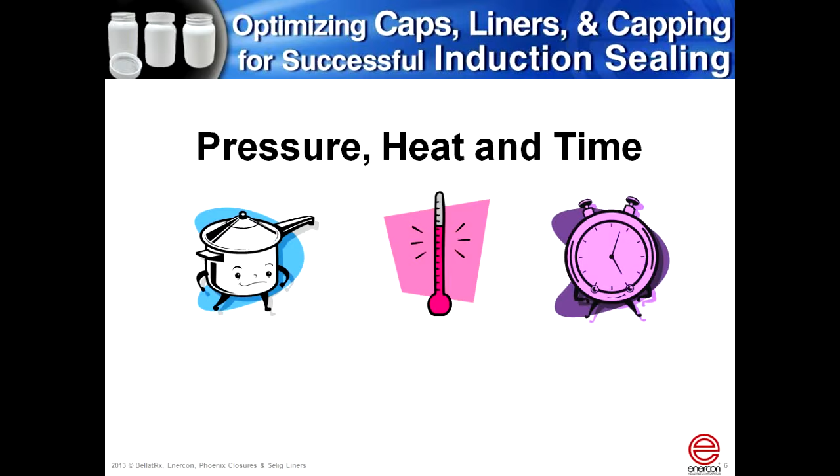I'd like to begin by introducing Ryan Schilke, who will cover the principles of induction sealing operations. Thank you, Mark, and thank you everyone for joining us today. We're going to start the webinar on a high level and discuss basic principles of induction sealing that apply in any application. The first piece we're going to talk about is one of the critical components to understand, and that is the theory of pressure, heat, and time. Any sealing process that you undertake in your operation is going to require those three elements. So let's dive into each of them a bit deeper.

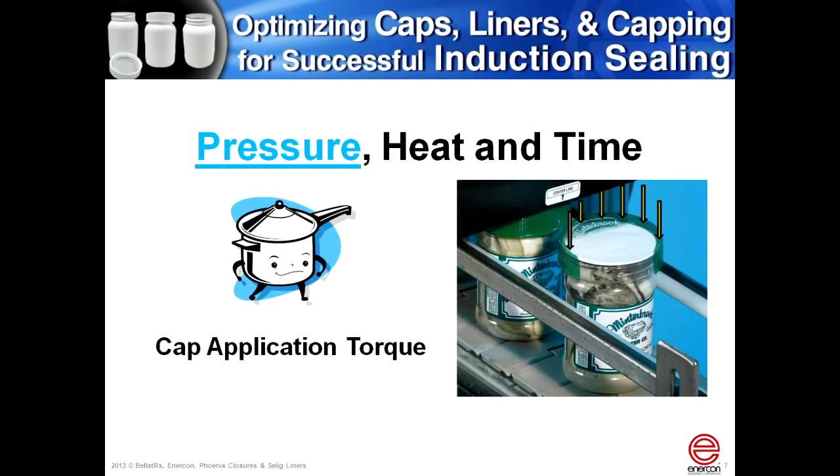Pressure in the induction cap sealing process is very critical. The pressure that is applied from the cap to the lining material, which puts it in intimate contact with the bottle, is provided by cap application torque. We're going to talk a lot about cap application torque throughout the webinar today, so keep this piece in mind as we go through.

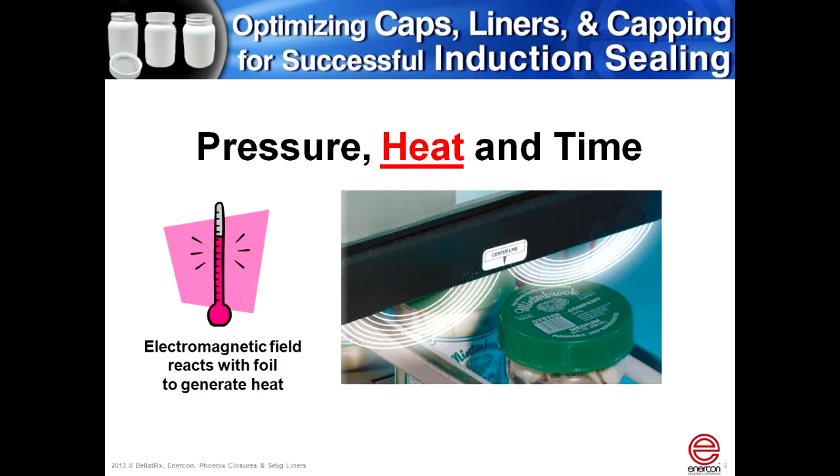The heat component in the induction sealing process is generated by the induction sealer itself. The picture on the screen here illustrates the magnetic field that's created by the induction sealer. You'll see the little white arcs coming from the center towards the sides of the sealing head in this picture. That indicates how that field generates throughout the width of the coil. This happens to be a case where it's going to be a wider application. It happens to be a 63 millimeter closure, and the heat is going to be varied based on the power level you set the machine at.

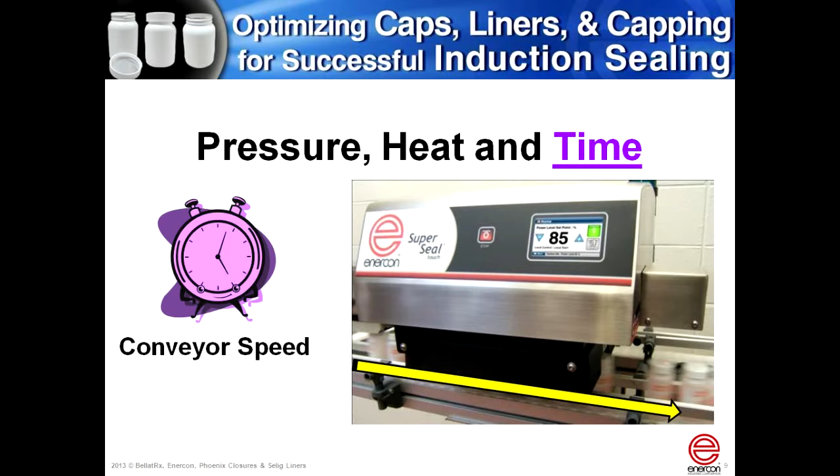The final component in pressure, heat, and time is obviously time. Time for this is not necessarily in minutes or seconds, but it is dictated by the conveyor speed, by the belt speed at which your product is running. So we'll take a look and say if you're running 50 feet per minute, we'll size the machine appropriately for 50 feet per minute, as well as knowing your cap diameter and the cap style involved.

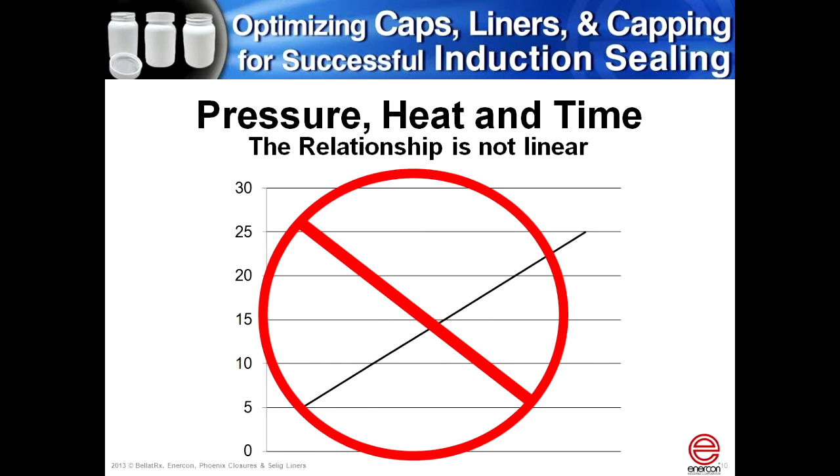As we talk about time, an important thing to remember is that the relationship between this pressure, heat, and time equation is not linear. If your product is running at, let's say, 100 feet per minute, and you decide to increase that by 10% to 110 feet per minute, keep in mind that the relationship between the power level needed on the machine is not necessarily linear. There are cases when it does happen, but it's always important to run and qualify your operating window, which Jeff from Enercon will get to a little bit later in the presentation.

So let's talk about a few variables in the induction sealing process, the first of which is air gap. And when we talk about air gap, what we're referring to is the distance the foil is from the sealing head, or the top of the closure from the bottom of the sealing head. This is important to be consistent.

The gap can be 1/8 of an inch, which is something we often recommend. Sometimes it's 1/4 of an inch, completely acceptable as well. It could be 1/2 an inch, but that probably isn't going to be overly effective. You're not going to use your machine as effectively. But the most important thing with your gap is that it's consistent.

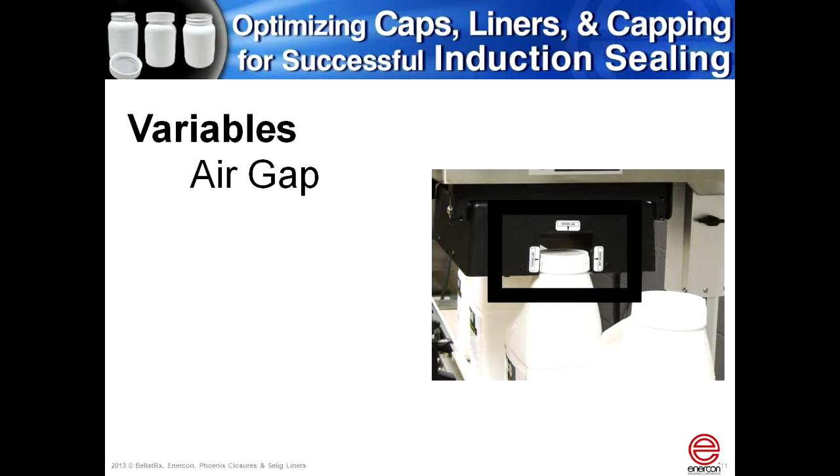And we actually provide a tool with each of our systems. It's about an 18-inch ruler, 1/8 of an inch thick. You set one or two of them on top of a bottle on either end of the machine, simply lower the machine down, and that will set your air gap consistently each time. And Jeff, again, will dive into that a bit more later.

In these cases, it's important to note that you're doing this in your application, and we'll design a special sealing head for your application to make sure we can be just as efficient as possible.

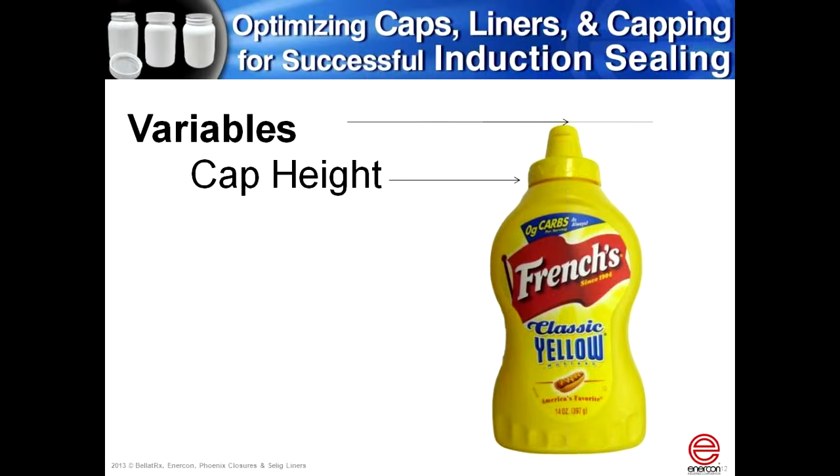I mentioned it in the pressure, heat, and time component, but application torque, I'm going to mention it again. We're going to dive into it deeper, but this is the most critical component to get right in your induction sealing process to ensure every time you're as consistent in your seal as you'd like to be.

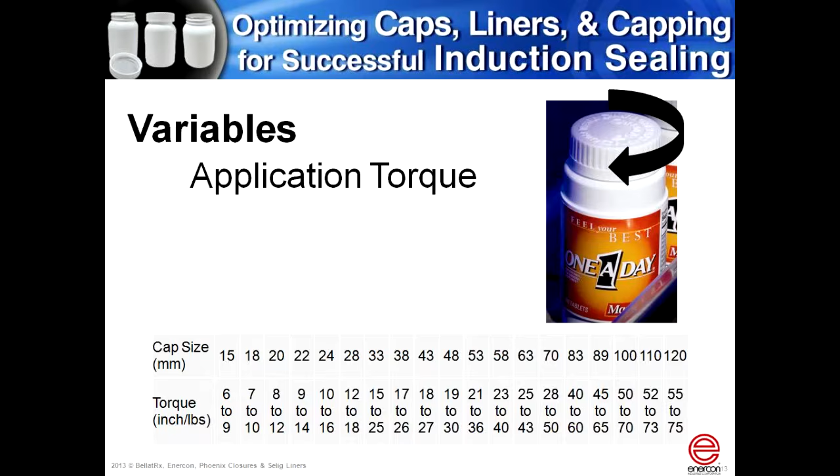The final variable that I want to talk about is material change. And this can be anything from a wholesale material change, maybe that's your packaging, your bottle in maybe an HDPE bottle and you want to change to PET, or it could be simply changing from supplier A to supplier B.

It's important to note any of those changes and make sure you run compatibility tests with the induction seal material and the bottle that you may be changing, or if you're changing cap suppliers, that the lining material stays the same so that piece does not come into effect and ultimately change your success in the induction sealing process.

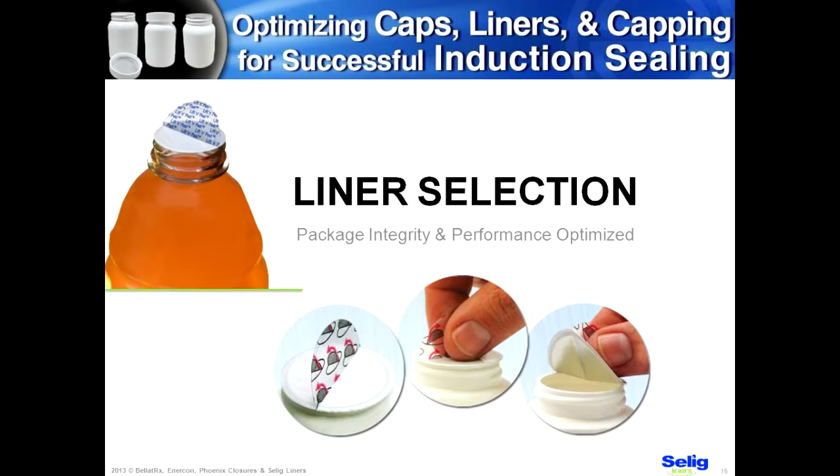Before we talk about selecting the ideal liner, we need to think about the benefits that a liner provides so you can customize your selection. The best liner for you is really the one that most efficiently meets your needs. Originally, liners were used for leak prevention, and that's still the most common use of liners, but they've also provided other benefits as well.

For instance, with induction seals, they provide consumer confidence that the product they are purchasing is safe and secure, all the way to the extreme of providing tamper evidence. Induction heat seals do meet the tamper evidence requirements for regulated products, such as analgesics and pharmaceutical products.

Liners also provide a hermetic seal, essentially zero gas transmission and zero moisture vapor transmission. What that means is it keeps the good stuff in, like fragrances or active ingredients, and it keeps the bad stuff out, especially moisture for products that need to be dry, like powdered coffees and granules. It also keeps out oxygen for those products that are oxygen sensitive.

We have several applications where the liner is actually being used as a means of anti-counterfeit. These are typically for products that are more expensive or ones that have very complex and varied distribution, where it's easy for the counterfeiter to introduce their product. It's not a huge problem yet in North America. This tends to be more of a Eastern European and Latin American issue with things like pharmaceuticals and liquors. However, it's becoming a much more significant problem in North America.

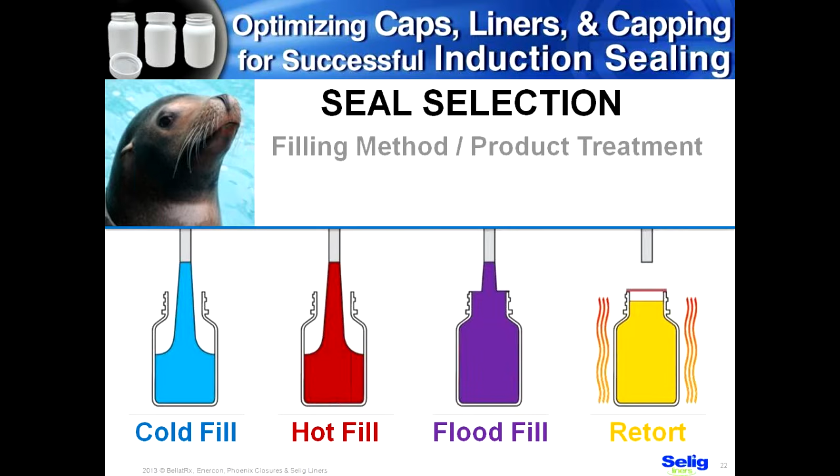The third thing to consider is the filling conditions, post-filling package treatment, or even distribution. In the case of hot fill, cold fill, and things like retort, there's a significant amount of potential energy transfer, and that needs to be considered as we're going through an induction sealing process, which uses heat as a means to seal the induction liner. Also, if you have a product that's being distributed or filled at a low altitude and distributed to high altitude, or vice versa, you need to consider that to make sure you have the right mechanical structure in your liner.

The fourth step is looking at your seal and whether it requires tamper evidence or not. Clean peel is more typical. However, tamper evident seal, if your product requires it or you want it, needs to be considered up front. Basically, in the tamper evident liner, the bond is stronger than the structural integrity of the liner itself, and that's how a tamper-evident liner is created.

The fifth step is looking at your reseal integrity. After the foil has been removed by the consumer, does the package still need to have a superior seal or reseal against usually things like oxygen or moisture? This is accomplished through what we call a two-piece liner.

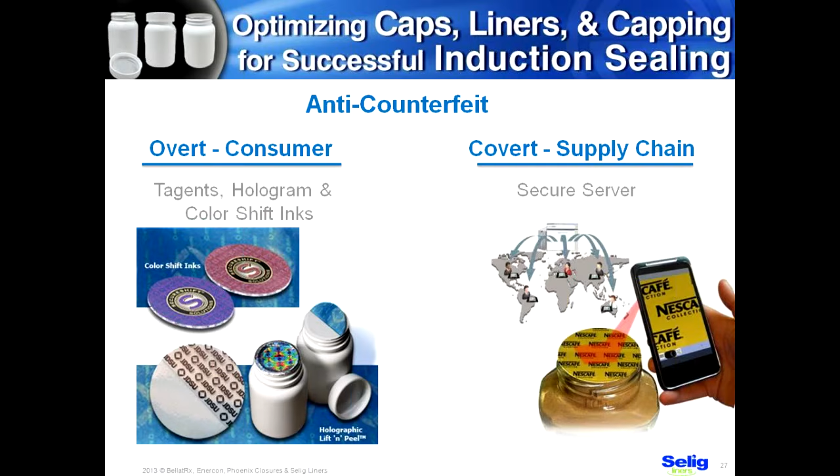There's also an opportunity for defending your product against counterfeiters with anti-counterfeit means. Overt counterfeit means are typically visible, intended for the consumer, so they know they have an authentic product. The covert or secret means are non-visible, meant for the supply chain and retailers to evaluate that product on the shelf and audit it to make sure it's authentic. They can use this information to go back and determine in what region and which specific retailers there might be a counterfeiting problem.

Lastly, the brand owner has an opportunity here. The liner itself is potentially a large piece of real estate, a blank canvas. This is the last contact the consumer has before enjoying that product, so it's an excellent opportunity to promote your brand through couponing. We've done instructions, we've even done 2D barcodes that allow your consumer to go directly to your website for more information.

So in the end, what's the best seal? Well, that really depends on the function and the details of the application itself. With knowledge, you get success.

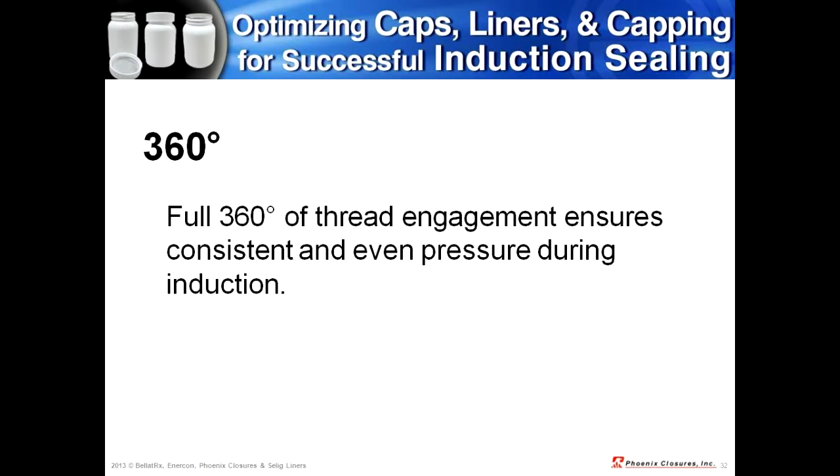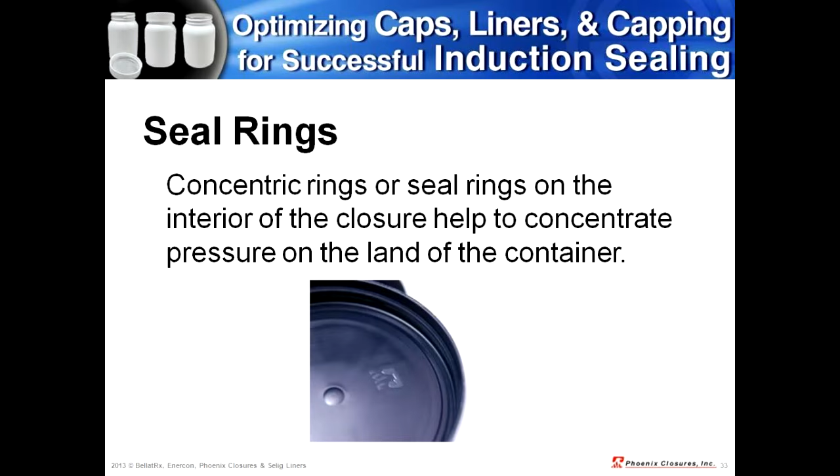It's also important to understand that liners are retained in the cap and delivered to the package before induction sealing. The process begins with a roll or web of liner material that is punched into a specific shape and size, chosen based on the particular closure in use.

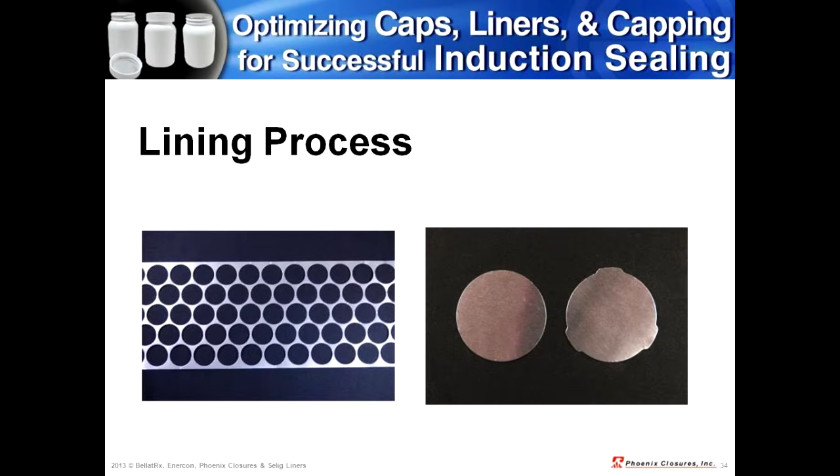Those cutouts are then inserted into the cap with automated machinery. You can see in this picture on the left the web of material with all of the punch outs, and on the right we're cutting out either a round disc or a disc that has retention tabs on it.

That leads me to how we retain the liner inside of the closure. There are a number of different ways to do that. Typically liners are retained in one of three ways: one is with an adhesive or glue, the other is to friction fit the liner into a specifically designed retention well in the closure, and the third way is to friction fit that liner into the cap using retention beads and tabs on the liner itself.

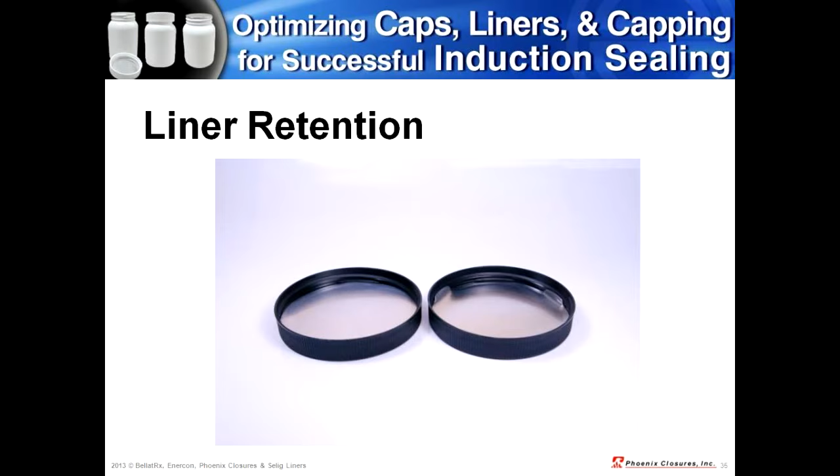You can see in this picture on the left a round disc that is being retained in the closure with a retention well, and on the right a similar cap where the liner is being retained into the closure using tabs on the side.

Storage conditions can have a huge impact on liner capabilities long term. It's important for everyone to use FIFO as they rotate their inventory, but certain liners are susceptible to certain environmental conditions. Two-piece liners, such as John was talking about, that are held together with a wax bond, are very susceptible to heat. So keeping those in a controlled environment is critical, with temperature between 60 and 86 degrees Fahrenheit.

Two years ago, we had a complaint come out of the field for failures of a wax-bonded liner. The customer was certain they were keeping their inventory in an air-conditioned, environmentally controlled warehouse and couldn't understand how there could be any heat issue. As we investigated, we found that some of their caps ended up being stored right next to where they kept their forklifts. Propane-fired forklifts were idling within literally inches of where they were storing their caps, and as a result, they were causing heat problems in that wax layer.

Other storage problems can be particularly noticeable with paper or pulp-backed liner materials that are susceptible to humidity. The recommended humidity levels in your warehouse are between 40 and 60%. Anything above that, you may have the problem of liners beginning to curl, and if they curl far enough, they can come out of the closure.

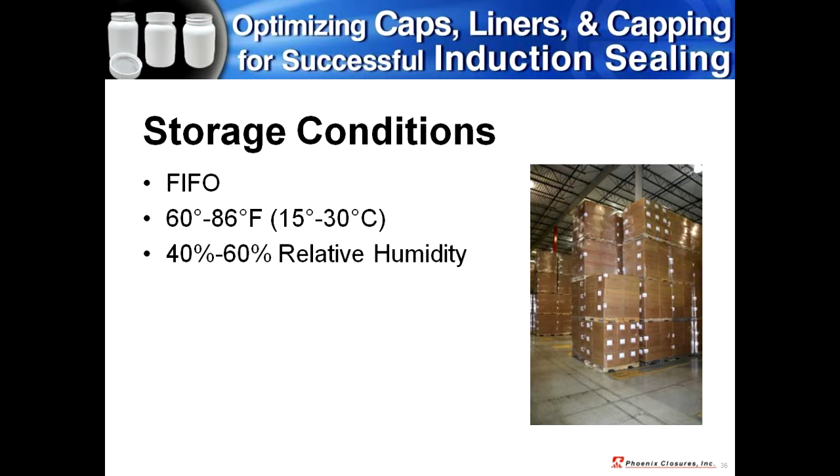The last thing I wanted to touch on is the concept of putting together a consistent package, especially if it's designed for consumer convenience. You've done a great job coming up with a bottle design that's easy for the consumer to grip, and chosen a closure that's easy to remove, with knurling designs or an easy grip feature. The last thing you want to do is put in a liner or induction seal that requires the consumer to break through it with a household implement. You don't want a weld seal on a package you've worked hard to make easy to get into.

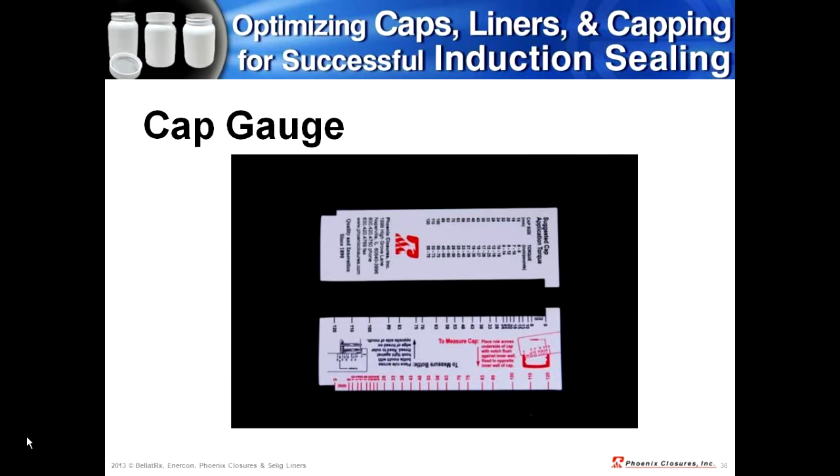Thank you, Tim. Over this next section, I'd like to talk to you about how to optimize your capping process for successful induction seal. In a basic format, let's talk about the capping process.

First, there is the sorting of the bottles and caps. The caps are typically sorted with a vibratory bowl, a centrifugal bowl, or sometimes a cascading elevator, while the bottles come into the capping machine using a conveyor, a star wheel, a feed screw, or sometimes side belts. The cap placement is where the cap meets the bottle, and this is a critical part of the capping process, which we will discuss a little bit later.

Cap inspection, if available, gives a lot of great value to your capping process. Cap torque is where you achieve the required torque, and if available, cap torque verification gives you the security that you are achieving the right torque.

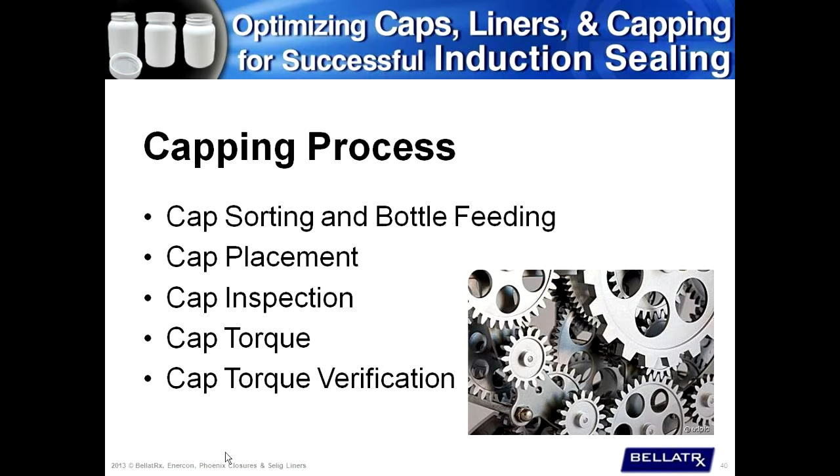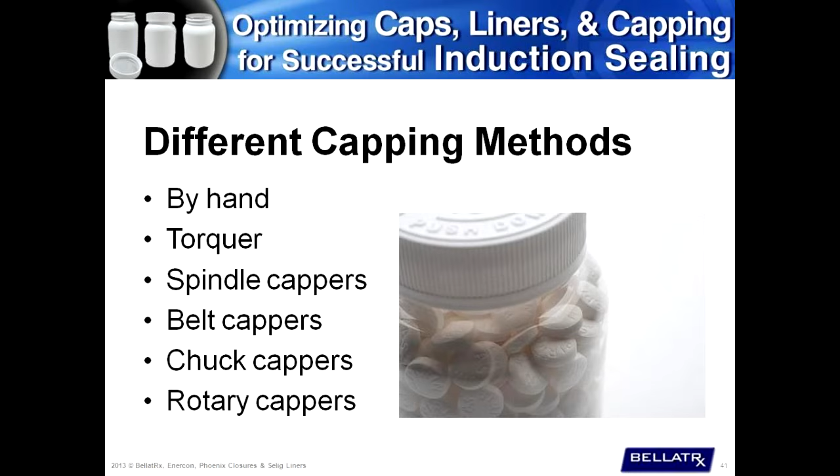The next section, we'll talk about different capping methods. Capping could be done by hand, using a single station torquer, using spindle cappers or belt cappers. There's also chuck capping and rotary capping. Over the next couple of slides, we will talk about them in a little bit more detail.

In the most basic format, hand capping is where the operator places the caps and torques them onto the bottles. Although there's no capital investment in this scenario, there's a recurring cost of the operator being there. There's a risk of injury due to repetitive motion, and the torques that are applied are rarely consistent, which may cause problems for induction sealing later on.

This process cannot be validated in industries that require validation, and the speeds are fairly limited, maybe 10 to 20 bottles a minute with a good operator.

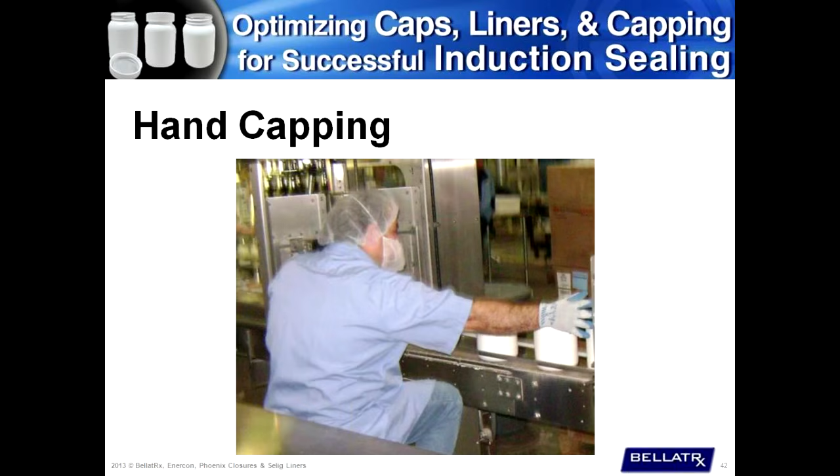The next capping method is using a torquer. By torquer, I mean a single station, either on a conveyor or with a handheld device. The operator places the caps by hand onto the neck of the bottle, and the torquer would apply the torque. Now, the operator is still required, and therefore there is a recurring cost going forward.

It's a lower capital investment. There's still a risk of injury due to the fact that the operator would have to continue to apply the caps manually. The placement of the cap is typically inconsistent, and without any further verification or inspection afterwards, this process also cannot be validated, cannot be repeatable. And the speeds are fairly limited, 20 to 30 bottles a minute.

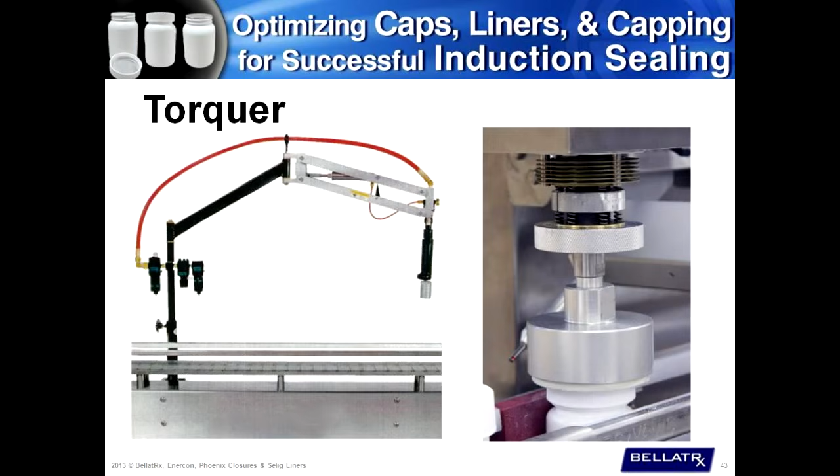Spindle capping is the next level of capping. Here, the spindles or discs make contact with a cap, and they spin the cap onto the neck of the bottle. This is a less expensive capper, and the bottles do not stop. The belts grab the bottle as they come into the system, and they guide them through in a continuous motion through the capping process.

Due to the point-to-point contact of the different spindles or discs with the cap, the torques sometimes would be inconsistent because there's not a lot of grab between the spindle and the cap. There's also a high rate of cross-threading, 10 to 15%, due to the fact that the caps are typically picked up on the fly as the bottle is coming through. The neck of the bottle makes contact with a cap that is positioned on an angle. The cap is typically not rotating at that stage and causing a high level of cross-threads.

Spacing of bottles is required because you cannot put too many bottles through the system. And the speeds of this machine can be quite high, in terms of 200 bottles a minute or so.

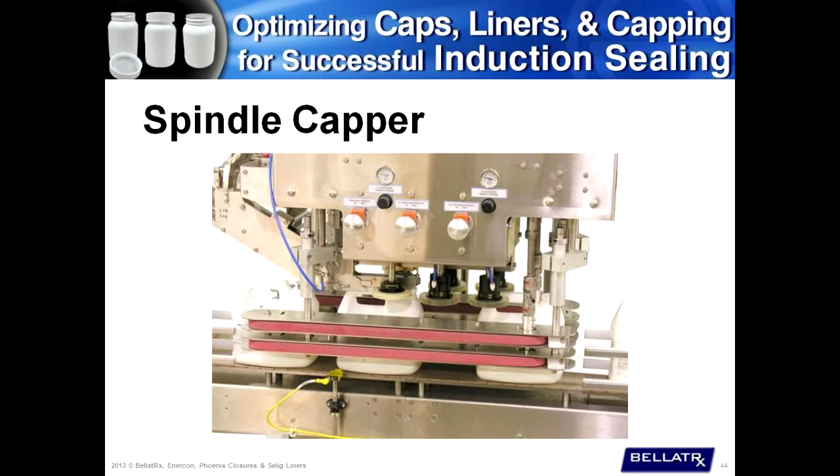Next, we'll talk about the belt capper, which is very similar to the spindle capper. However, it's belts that make contact with the cap instead of spindles. Although it's slightly more expensive, it offers benefits: the belts can form around the cap, making more contact and therefore better torque control. Nonetheless, there is still a high rate of cross-threads due to the fact that the same mechanism of cap pickup is utilized in most cases.

Speeds could be high. However, it is limited to one cap at a time, making contact with the belt to be able to control your torque properly. And therefore, it could be slower than a spindle capper.

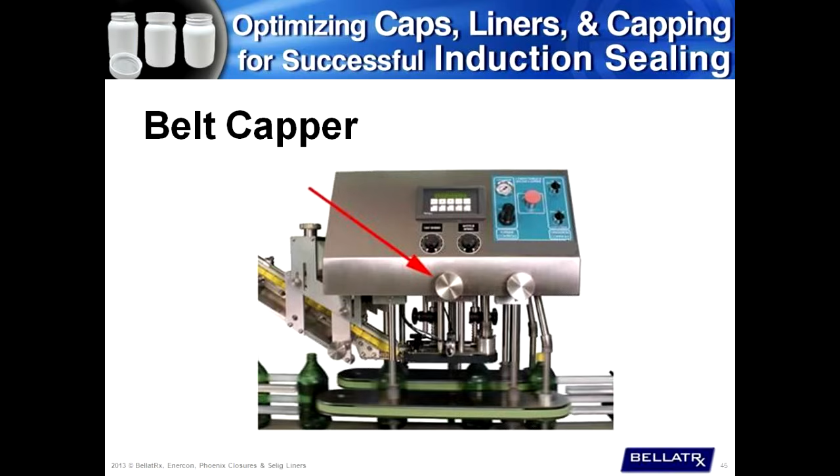The next capper is an intermittent capper that we'll look at, and that is a chuck capper. Here, the cap rotation and application is perpendicular to the neck of the bottle.

Now, although there are change parts required, typically they're not expensive. The torques are very consistent because only one chuck makes contact with a cap, and therefore we are able to achieve the desired torque consistently.

One point to mention with chuck cappers is that the application of the cap is perpendicular to the neck of the bottle. The cap is typically spinning and synchronized, the rotation of it is synchronized with the threads so that the cap actually floats onto the threads as opposed to being slammed on. Here, that would allow us to reduce the level of cross-thread down to 0.5% or 1%.

Mind you, the speeds on the chuck capper, since it's an intermittent motion machine, are limited. It could range from 60 to 120 bottles per minute.

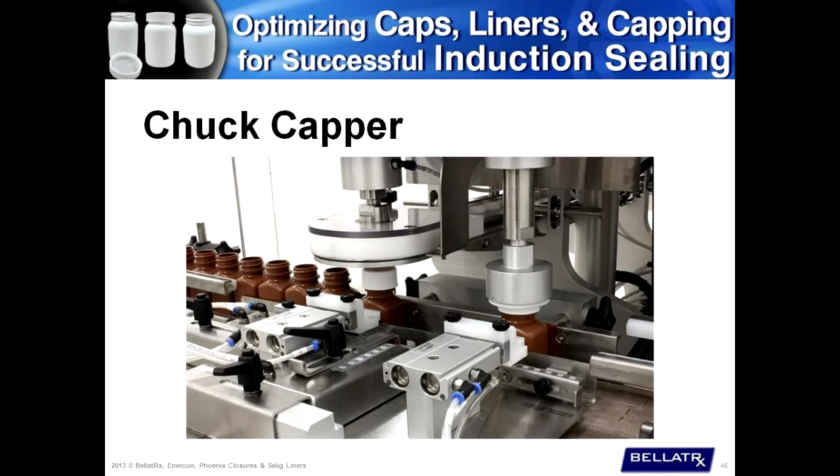And finally, the rotary cappers offer continuous motion. There's typically multiple heads, 4 or more, which come in contact with the cap and bottle. It's relatively more expensive than the other capper models that we've talked about and requires change parts. However, the high-speed capabilities of a rotary capper make it fit for specific applications.

Again, here, the torque application is perpendicular to the neck of the bottle, and therefore we're handling one cap at a time, and that allows us to be precise with the torque application.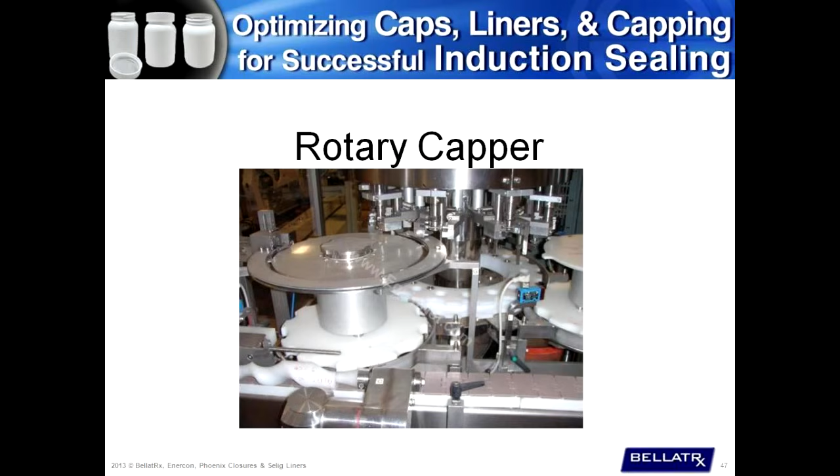Over the next few slides, I'd like to talk to you a little bit more about some capping considerations. The cap placement station is probably one of the more critical components of capping, and that's where cross threads happen if not handled correctly.

There are certain types of caps, like embossed lettering caps, Yorker caps, snap caps, or caps with tabs or flip tops that require certain types of cappers, where chuck cappers and rotary cappers may be better suited solutions as opposed to spindle and belt cappers, which will interfere with the tabs and the cap pickup.

Now, I talked about it before, but I want to elaborate a little bit more on that now, and that is the angle pickup of a cap. When the neck of the bottle comes through and picks up the cap on an angle, typically the cap is not rotating, and a device pushes the cap onto the threads, and then the cap is spinning. That is the case with belt cappers and spindle cappers. That often is done due to speed constraints, trying to achieve higher speeds.

However, the cost is higher cross threads. In chuck cappers and rotary cappers, since the rotation of the cap application motor and the down speed are synchronized in a way to allow the cap to float onto the threads, the number of cross threads is limited.

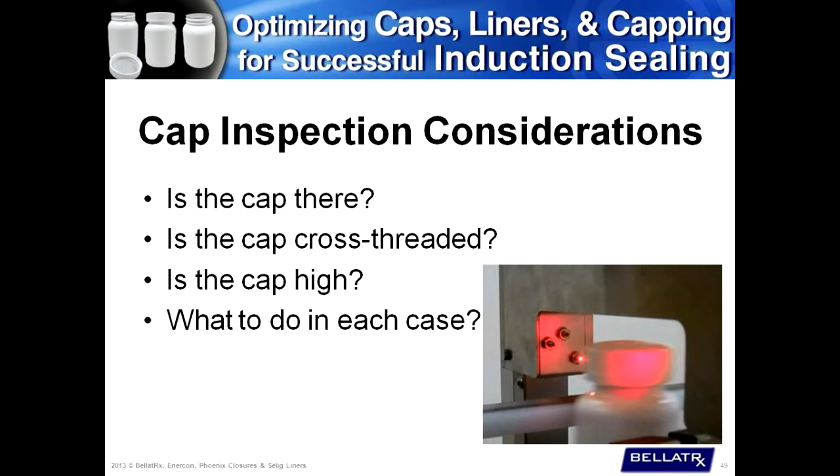In previous sections, we discussed the application and removal torque, and the next slide will talk about these torque considerations. The application torque is what the capper applies onto the cap, and the removal torque is what you are able to test with the torque tester that was mentioned previously.

One point I want to bring up here is immediate removal torque. It is important to note that when testing for removal torque, you need to set a time factor in terms of how long after you pull the cap offline you need to measure the removal torque. The longer you wait, the more the relaxation will take place in the liner and cap, and therefore the torque values might be different.

There are 3 ways to apply and control torque onto the cap: using mechanical clutches, magnetic or pneumatic clutches, and servo motors. The mechanical clutch wears over time and needs constant adjustment, and also requires some trial and error to achieve the torque that you're looking for.

Magnetic clutch does not wear over time. However, it still requires the trial and error scenario. The servo torque motor offers superior torque control capabilities, which we'll look at in the next slide.

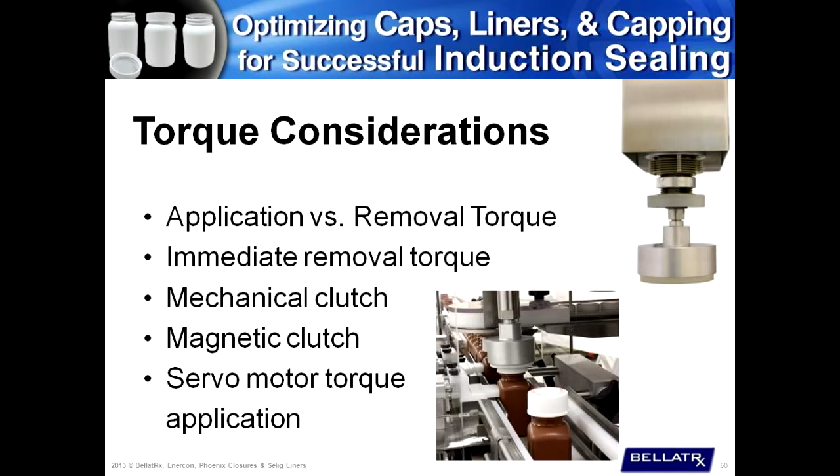What's important to note here is that it provides immediate output, and that is when you're using a servo torque, it provides immediate torque output. What I mean by that is that when you set the torque value that you want applied onto the cap, the first cap out of the system will be at that torque, and therefore there's no trial and error in this scenario. Also, it gives you some diagnostic capabilities, such as low torque inspection.

The ability to monitor this type of chart in the background of the system's software allows you to eliminate the initial impact of the chuck with a cap, preventing erroneous torque readings, and allows you to control the downforce. Very little downforce is required if you have the right solution. It also allows you to detect any slippage between the chuck, the neck, the capper, or the gripper, so you can reject bottles that did not achieve the proper torque.

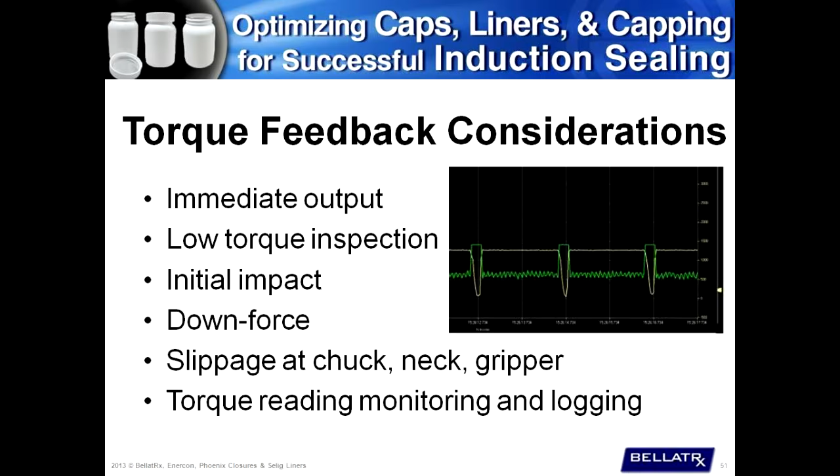Now that we know all about the liners, the caps, and the cappers, it's time for the rubber to really hit the road and actually create a seal. Keep in mind that every application is a little different and has its own challenges. You need to understand how and why you get the best seal. We're going to summarize the steps to help you determine where your sweet spot should be to ensure you get a good seal every time. A more detailed explanation of this summary can be found on our website if you need it.

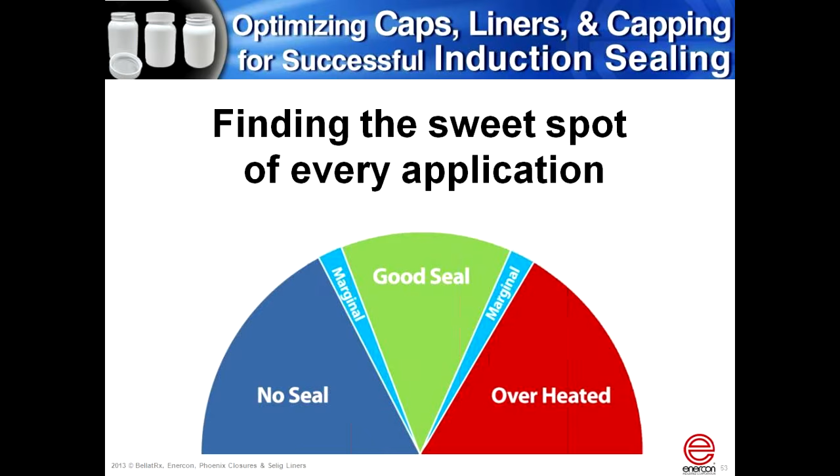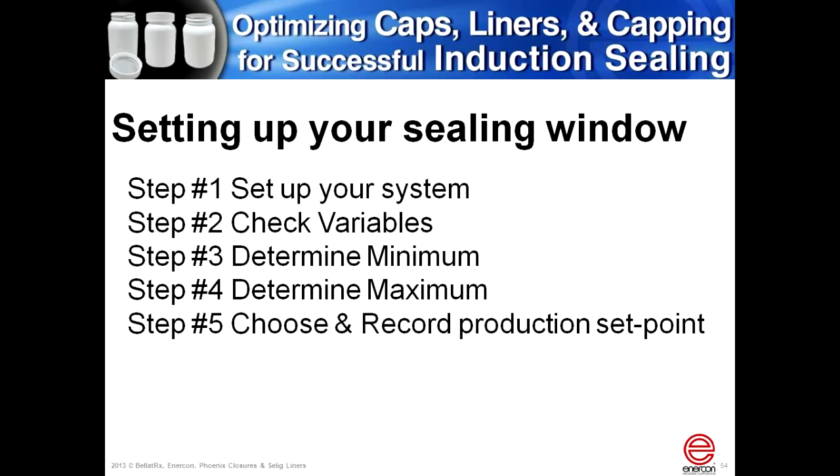There are 5 basic steps when determining your sealing window. First, make sure your system is set up properly. Next, check all of your variables—many of these have already been covered. Third, find the lowest output where you can get a good seal; that's your minimum. Next, find your maximum where you can get a good seal. Together these two points define what we refer to as your sealing window. Lastly, select your production output setting and record your data for future reference.

First, you have to make sure your sealing head is aligned properly. If not, you just won't get even seals. Your bottles have to travel down the center of the sealing head. We provide stickers on all of our sealing heads to aid in this process. You may find that you need guide rails under the sealing head to ensure proper travel.

Next, you need to set the air gap, which Ryan referred to earlier. He also mentioned that we provide a gap gauge with every system to help with this process. Make sure you've got an even air gap all the way across the coil—we recommend a 1/8 inch gap. As Ryan said, consistency is very important.

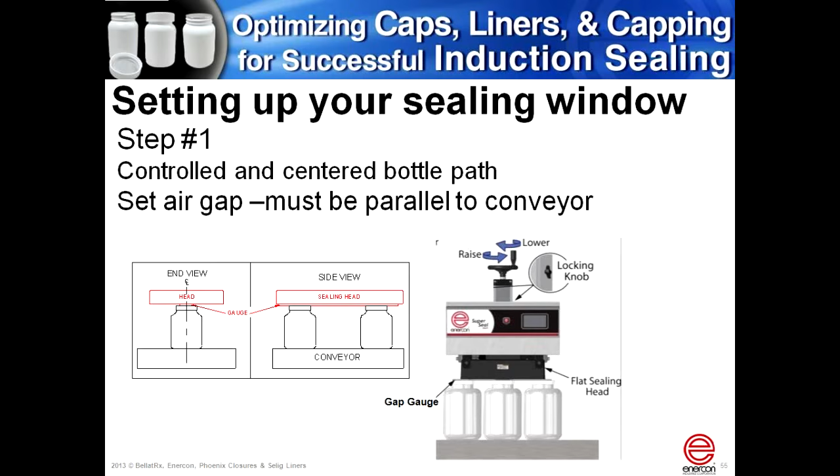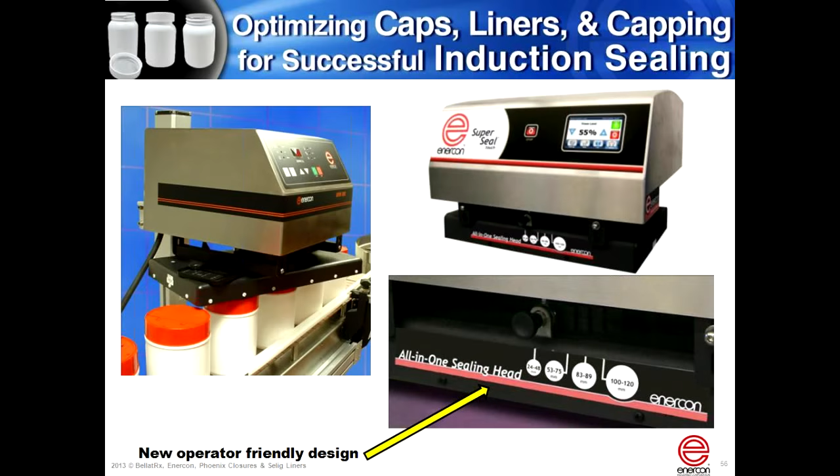Now that you've set up your sealer properly, you need to check and be aware of all the other variables that can contribute to seal quality. Many of these have already been covered, so I'll only touch on them briefly. First, make sure you run any tests at your production conveyor speed. Next, ensure your liner and container are compatible for a good seal. Ensure your container and caps are free from defects, and verify that your application torque is within acceptable ranges.

Once you've taken care of all of these things, you're ready to run some containers and find where your sealing window lies. We recommend starting at a low power setting and working your way up until you just start to get an acceptable seal. This is your minimum set point for the sealing window. From there, slowly increase the output until you just start to see unacceptable signs of scorching. When you see that, you've gone a little too far, so back up until you see a good seal again. This is considered the maximum set point of your sealing window.

Now you've determined where you can get a good seal, but you'll have to choose where within that sealing window you'd like to set your sealer for production.

Hey Jeff, this raises a question. As you're talking about this, in the last example we showed some numbers, and it looked like a minimum set point of 55 and a maximum of 75, which would show a pretty big window. Are all applications that wide of a window? That's a good question, Ryan. No, they're not all that large of a window of 20% as shown on those slides—that was just an example. Some applications will have a wide window like that, while others, depending on many different scenarios, can have a smaller sealing window of maybe only 5% from minimum to maximum. But each one is different, so you have to run these tests to find out for yourself.

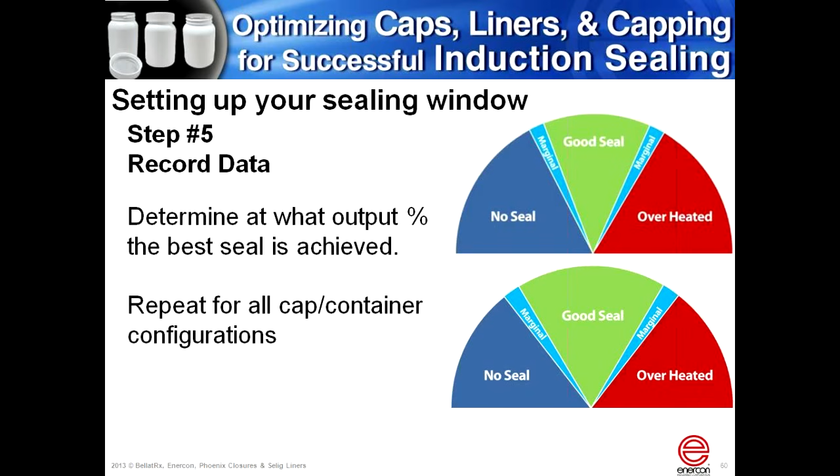So once you've got your sealing window set, you need to find your location within it. Some people like to put their production level right in the center of the sealing window and consider that the safest spot. But perhaps your application, you're not too concerned about a little bit of scorching, and you'd rather be on the higher end of your sealing window because you'd rather have a little overheating as opposed to a weaker seal. This will allow you to compensate for variables such as bottle height tolerances and variations in torque application.

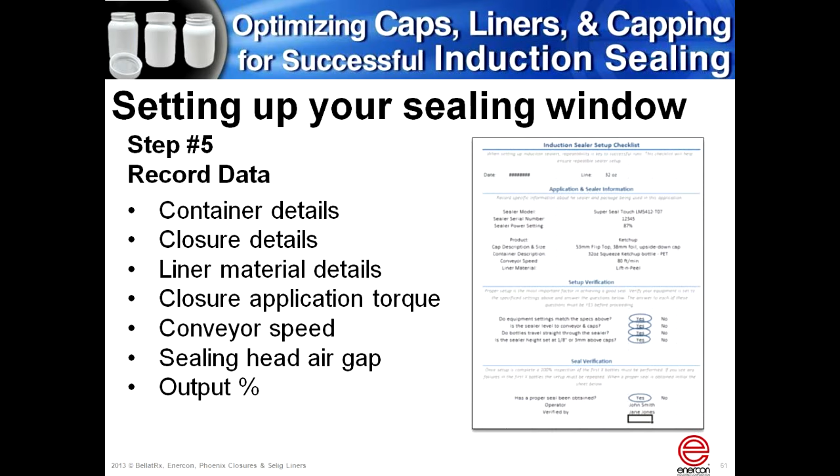Whatever set point you choose, you should now record all of your important information for future reference. Enercon can provide you with a checklist of sorts, as well as a good spot to record any other data.

If you have one of our Super Seal Touches or a new Super Seal Max, these units have provisions to store some of this information on board the sealer, making things much simpler for you and your operator.

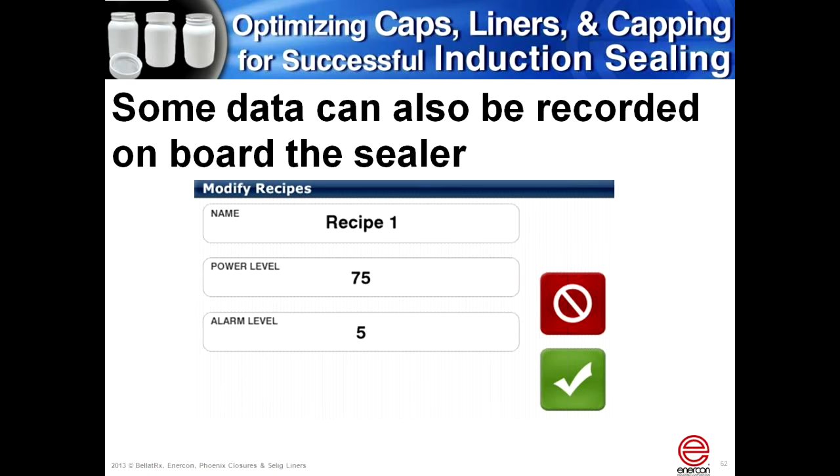With all of this, of course, we assume that you're familiar with what you need to look for in determining whether you have a good seal.

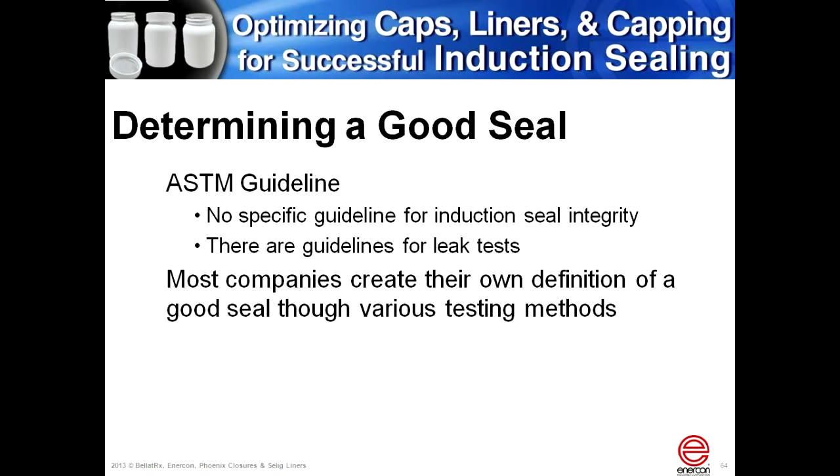Keep in mind that there are no ASTM guidelines for determining a good seal. Typically each company will set their own standards that they need to meet to consider a seal good. These will vary with every application. Here are some things to look for in a good seal.

Usually you can use a simple visual inspection. A good seal will have no discoloration on the seal or any backing material. There will be good adhesion all the way around the land area, which you determine when you peel the liner off. There will be little or no wrinkling of the liner.

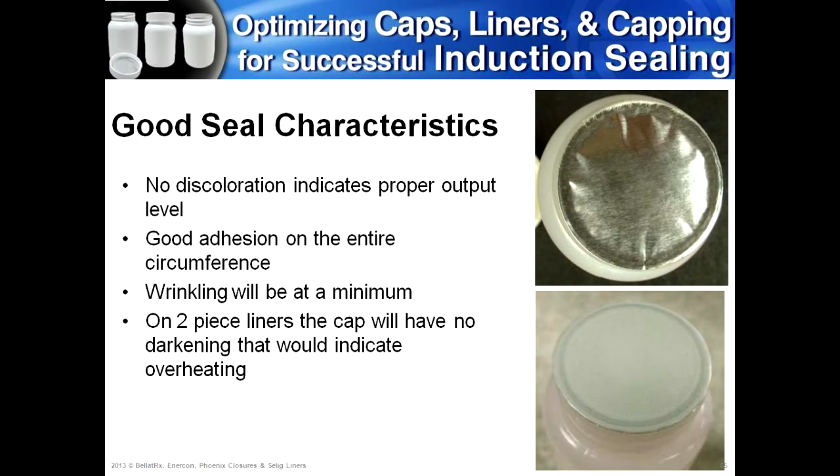A two-piece liner gives another piece of evidence. You can check the backing material that's left in the cap. Any discoloration here would also indicate overheating.

Beyond visual inspection, there are many other ways to check for a good seal, and your company will want to decide what is best for them. There are both wet and dry vacuum chambers that you can employ to check for leaks.

Take into consideration how your product will be shipped. Some companies have actually shipped a test run of their product to a certain location and evaluated the seals after they reach their destination. There are also inspection systems on the market that will test for leaks—these usually involve applying mechanical pressure to the container.

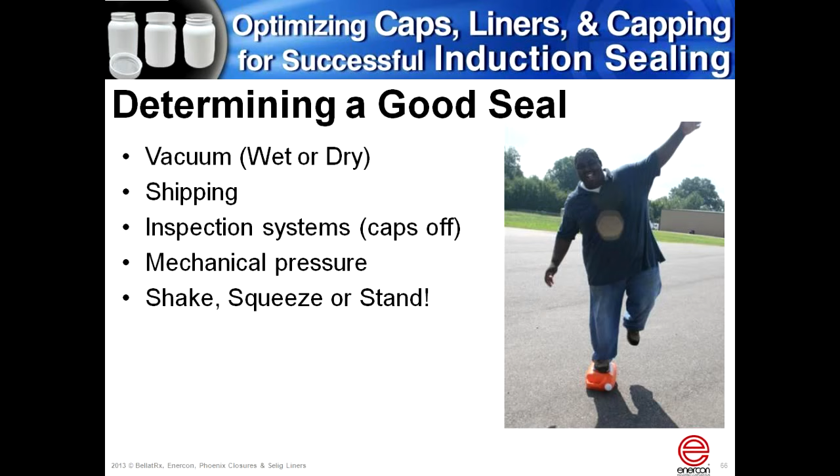Lastly, you can be like this guy and shake, squeeze, or stand on your container. I'd say that's a pretty good seal in that container.

At Enercon, we've got a submerged vacuum chamber for testing for leaks. We work with customers and in conjunction with their specs to determine if their seal is up to their standards.

Keep in mind that some liners will continue to set up for up to 24 hours. Contact your liner manufacturer for this type of information. I learned this the hard way on my very first startup over 15 years ago, where the customer was checking the seal immediately after sealing. But as long as you're aware of all your variables, this really shouldn't happen to you.

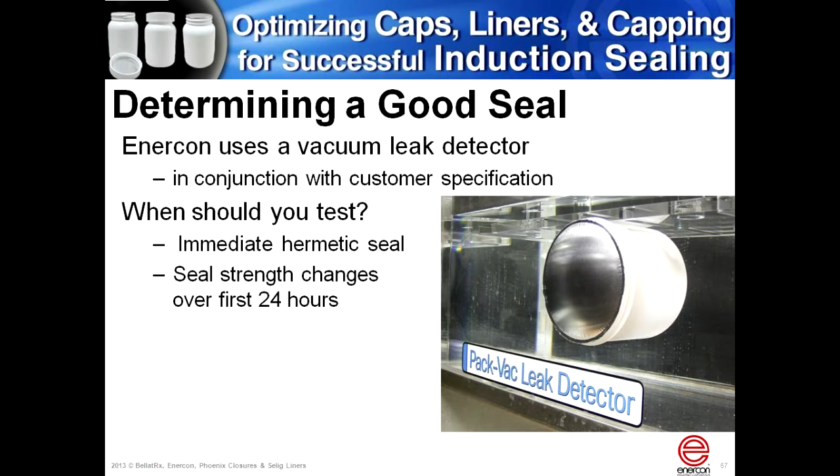In summary, we learned that pressure, heat, and time are certainly essential for successful induction sealing. We've learned that selecting the right liner is based on its desired function and obviously compatibility. You should consider value-added features for both marketing and packaging security when selecting your liner. It's important to ensure that your cap, liner, and bottle are compatible for both process and function.

It's important to recognize the capabilities of your capper and apply either electronic or manual quality control to ensure that your torque is consistent. And as you heard from all of our panelists today, torque is the number one sealing problem associated with the caps. And Jeff just went over how to set an operating window for each of your induction sealing applications.